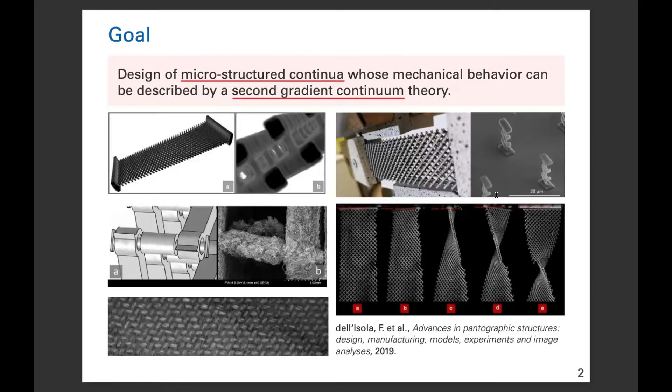Well, it's quite an abstract question. So first of all, you need to know what a second gradient continuum is. And if there's a second gradient continuum, there must be a first gradient continuum. And this is the most common continuum you're used to. You can also consider it as the Cauchy continuum. So it is the standard continuum we are often working with.

And starting from a variational point of view, this classification is very easy, because if we consider the special case of an elastic material, we can formulate an internal potential energy by a strain energy function, and this strain energy function depends on the material points. So it can be non-homogeneous, but also, that's important, on the first gradient of deformation.

Using the principle of stationary potential energy, we will get the internal virtual work, where as dual quantity to the first gradient of the virtual displacement, a second order tensor appears, which is the Piola stress.

And working in a variational framework, we don't know yet to what kind of external actions our material can resist. So this is something we have to prove in that framework, which is usually done by an integration by parts, together with the principle of virtual work, where we can see that the first gradient continuum can resist volumetric forces and surface forces. So sub-bodies interact with their complement by surface forces.

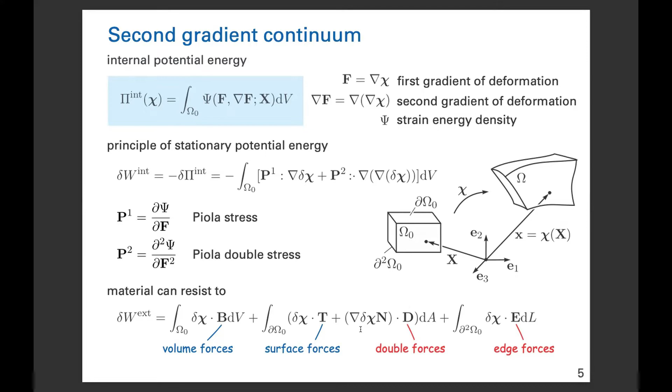Well, if anyone wants to get a particular case of a material, we look at possibilities to design a microstructure. And for that, I also do the same thing. I start with a first gradient continuum, how a micro-macro homogenization can look like, and how it is extended to second gradient materials.

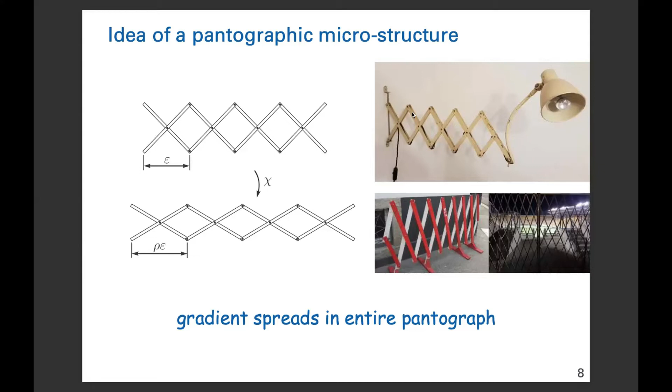So what we can do is relax the assumption a little bit, and instead of rigid bars, we take flexible bars. And the flexible bars are represented in a discrete system by interconnecting springs. And in order to get also some bending stiffness, we add some torsional springs so that the system doesn't collapse. And if one does an energetic homogenization procedure, which I just sketched before, we will end up with an energy that only depends on the mapping of the center line. So the only thing we need to know is how every particle on the center line deforms or maps into E2.

And when considering the first derivative of the center line, we can decompose it into a stretch part and the inclination angle in the case of a planar beam. And if we take the derivatives, so the stretch gradient or the change in angle, which is nothing else but the curvature, we can see that the stretch gradient is nothing else but the projection of the second derivative of the center line, so of the second gradient, in the direction of the tangent vector. And the curvature is the projection in the orthogonal direction. And both these terms appear within this homogenization process.

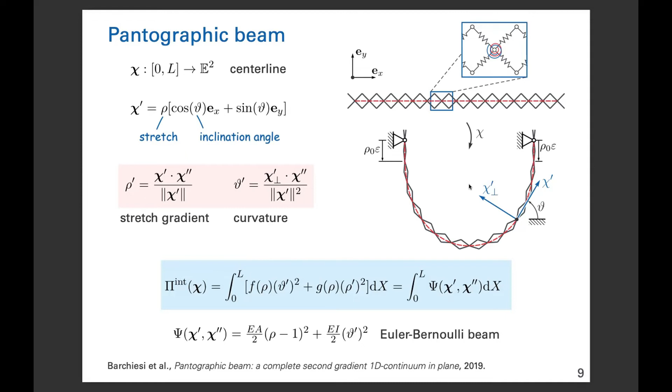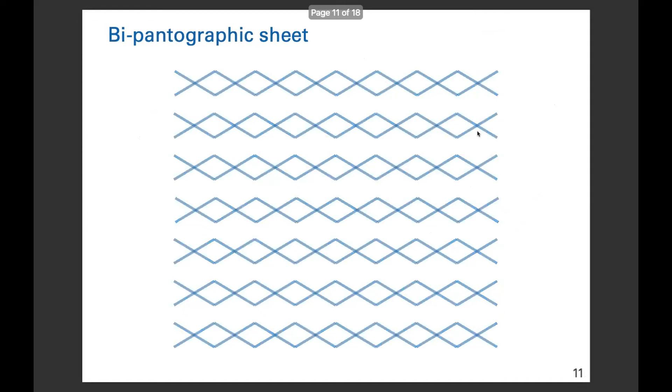So with this complete second gradient 1D continuum, we start to synthesize a planar 2D continuum. And the idea is the following: we place one layer of pantographic beams that are horizontal, and then, rotated 90 degrees, we place another layer of pantographic beams, and they are connected here so that the positions there must coincide at all times. And to make it a little bit more interesting, we cut out a sample that is rotated by 45 degrees.

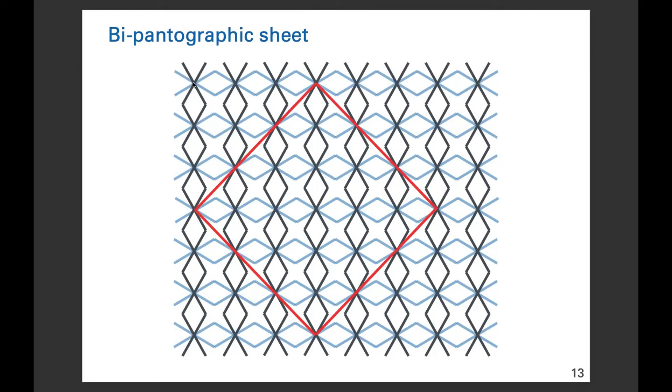So in the end, we have now here a 2D continuum with a microstructure where in the reference configuration in D1 and D2 directions, pantographic beams are pointing. And to get the deformation energy, the strain energy function, we basically have to add up only the contributions we have already derived before. The only thing we need to accept is that these fibers are embedded in the 2D continuum.

So if we project the deformation gradient F into the D1 direction, so in the direction of the fiber family 1, with this we can compute the tangent vector and also the normal vector. And if we want to have the second derivative in these directions, we have to project the second gradient into the D1 directions or into the D2 directions.

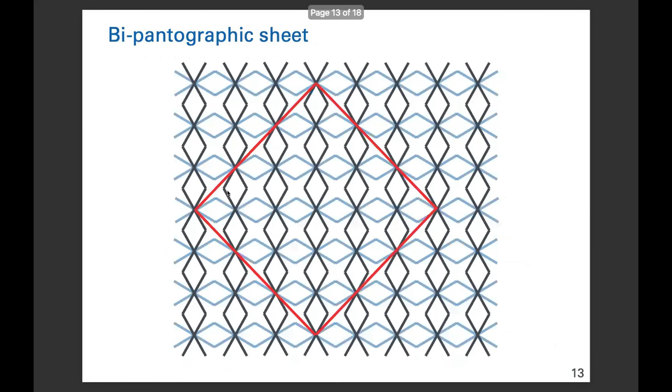So as before, as we had rho prime and theta prime, we now have the stretches in these fiber directions, so in one direction and in two directions. And then we add up both contributions we already had before. And clearly, this will include the second gradient of the deformation, so it is a second gradient material.

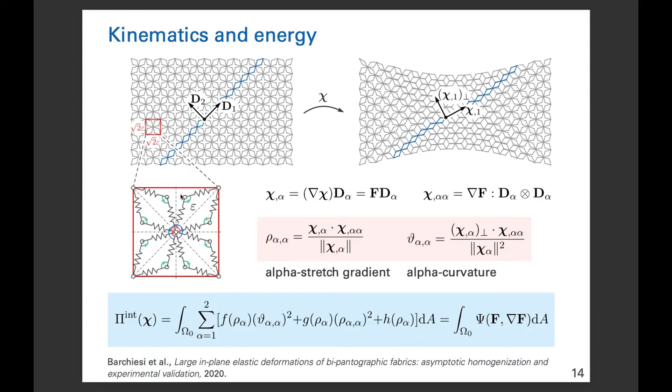And this is because in the materialization of our 3D printed material, we had to include certain hinges, and maybe you see it here. In the middle, we have a perfect pivot. However, at the outer arms, a perfect pivot would have been too small, and so we connected these little arms just with a pin, and this includes this additional stiffness. And in order to avoid any out-of-plane buckling, we added 4 such layers, and then everything was printed with PMMA, and then tested in a bias extension test.

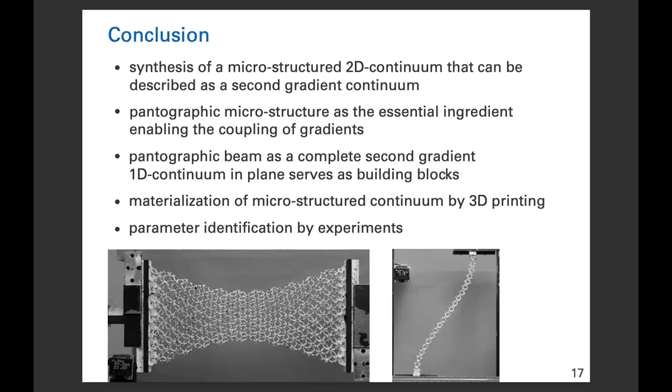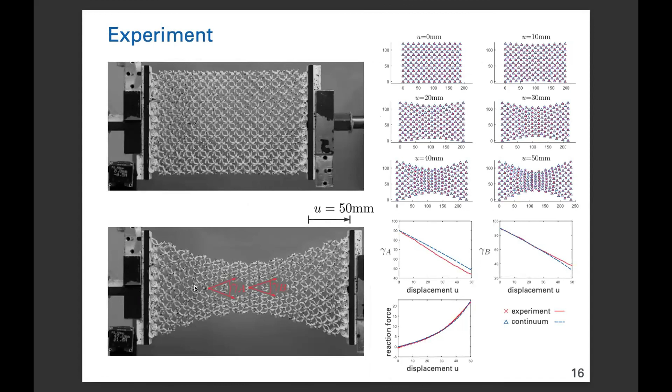I haven't done that, but I can tell you immediately that it is not a complete second gradient material. It is still not. You need to do something more. What you have to do, and this will be presented next year for the Lisola, and we have to write a paper, and now it's official, you have to add a third fiber direction for the shear.

So still, you can find some modes where the second gradient will have no effect on the energy, and this will result also in certain boundary conditions that generally appear in second gradient materials, but which cannot be captured by that bi-pantographic fabric. So this is work to be done. There are some deformations that do not have any energy.